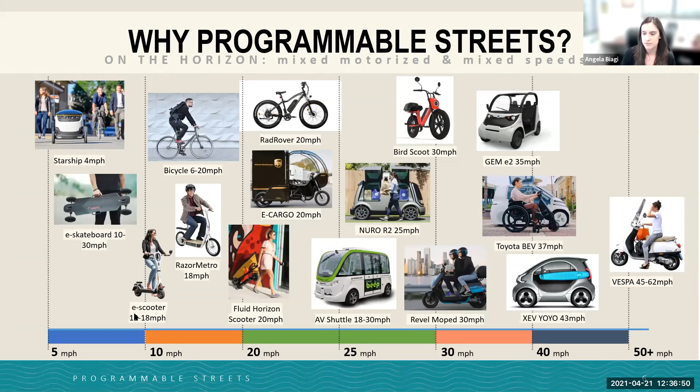A street that's programmable is flexible and can change with the needs of the day. So in the peak morning, maybe there's a dedicated lane for transit during the morning rush hour. In the afternoon, maybe more area can be opened up for pedestrian and cafe dining with less of a priority and less of a demand for vehicles. And in the evening, maybe the lane's direction could reverse to manage the PM rush hour. Lisa's going to talk a little bit later on how we can use technology to accomplish this.

And we've seen what happens when streets are static and there's this competition for space. In just this example alone, you can see the competition for seating, landscape, parking, dining, shade, advertising, lighting. And who's really losing here? When we try to do this all in one for everybody, it's the main user in this case, the pedestrian. Here we've got 3 pedestrians trying to navigate the sidewalk and it's not ADA accessible.

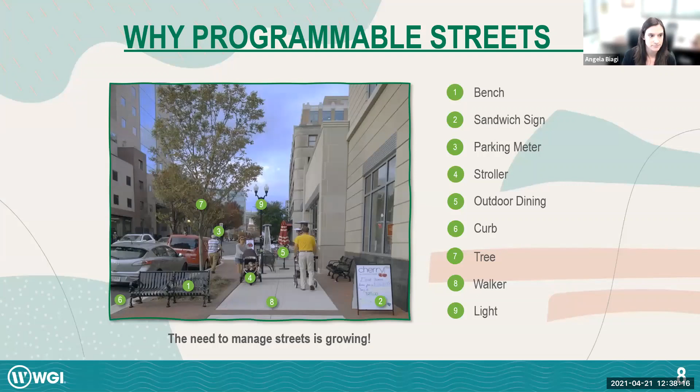From an economic standpoint, programmable streets can be really successful drivers of revenue as well. These are statistics from Texas, where a downtown Dallas street on-street parking space costs $1.50 an hour. If that space is full from 7 a.m. to 6 p.m., it generates revenue of $16.50 in parking. By contrast, if that space was converted to a dining parklet at key points during the day with multiple seatings, it could generate upwards of $300 in potential revenue in dining tickets alone.

So now I want to take a little bit of a deeper dive into how we can physically program these streets.

We learned a lot about this and the importance of it in the last year during COVID. The picture on the left is Clematis Street in downtown West Palm Beach. Shout out to our friends at Dover Kohl, who did a wonderful curbless design for this entire corridor. With this, the city was able to quickly and successfully implement an outdoor dining program on this new street design. I don't know if they really envisioned the level to which it was going to be used, but it worked.

The ability to successfully and quickly pivot the uses of our streets is so critical in making our cities resilient. Maybe ultimately these temporary changes put in place for social distancing will be transformed into a more permanent solution, kind of like the image here on the bottom right.

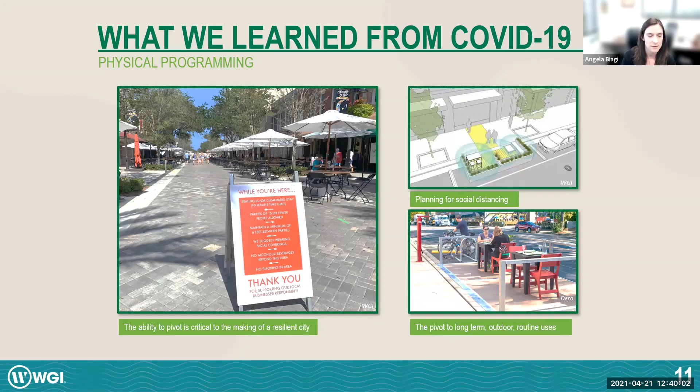We're really seeing growth in the availability of modular and liftable infrastructure to aid in programming our streets. On top, we have a couple planter options: one being used as a bike separator, the other used to define space in a plaza area. Both can easily be moved and relocated with a small forklift.

We've also seen the use of temporary bike lane delineators, as well as charging stations for scooters that can be moved based on demand and need of the area.

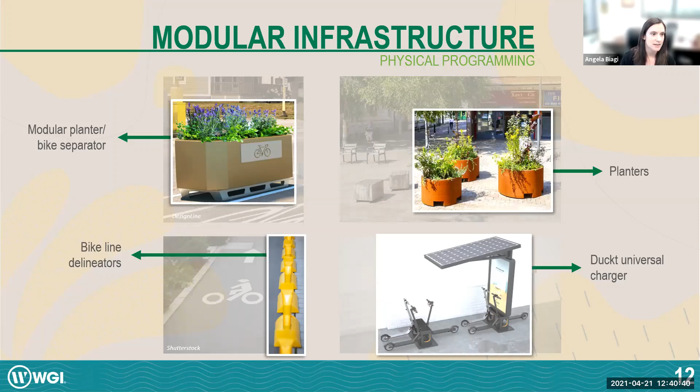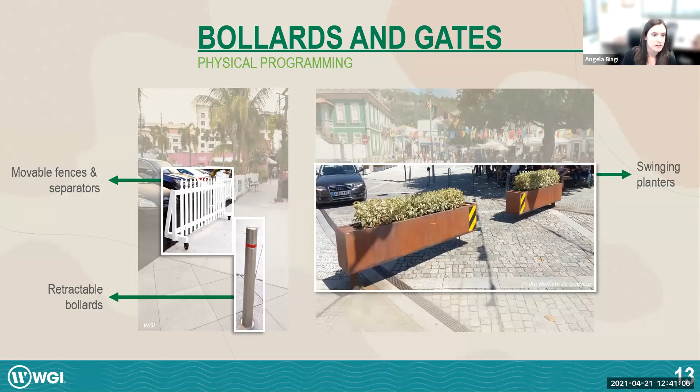To limit vehicle access, here's a couple examples of how we can use movable fences and separators. The top is just a fence that can be simply pushed and rolled around by hand, on wheels. The picture on the right is more substantial planters that swing open and closed to control the road as needed. And of course, we can use retractable or removable bollards for this as well.

Programming isn't just limited to the front of house. It can be expanded into the back of house or alley spaces as well. This is an activation of an alleyway done in Michigan, which took underutilized parking spaces and transformed them into a pop-up demonstration area. While some of these items could be considered more permanent, the space used movable planters, temporary bike stations, and temporary lane delineators as well.

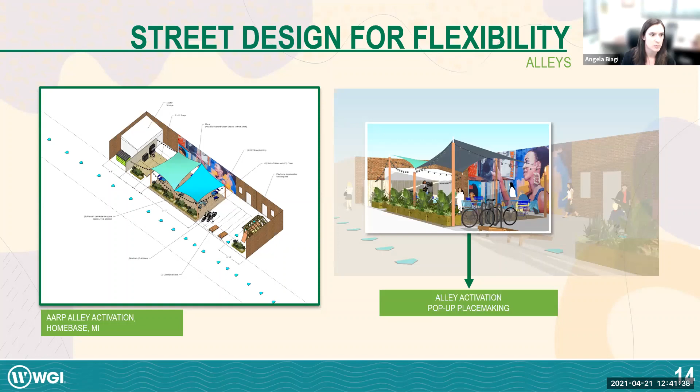Pickup, drop-off, and deliveries have become a huge stressor and user on our streets, not just with rideshare, but also with the rise of e-commerce and food service deliveries. These are a couple examples of how we actually fail to accommodate those users on the street.

Like the image on the left, sometimes it causes more conflicts with traffic. Alex and Jennifer are going to go into more detail on how important this is to our new types of mobility as well.

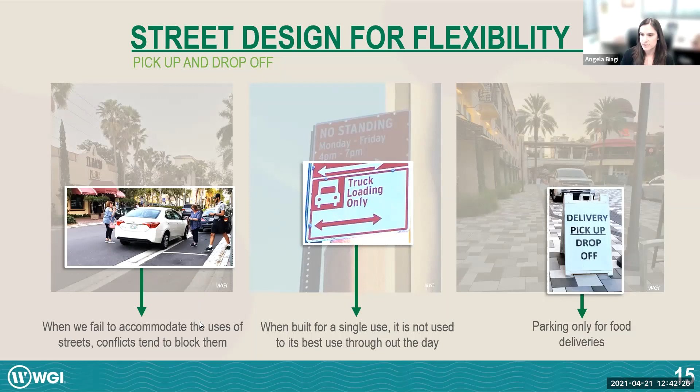When spaces are designed for just a single use, like truck loading or signed only for pickup and drop-off for food delivery, they tend to go unused during periods of time and really just aren't the best and most practical use of the space at all hours of the day.

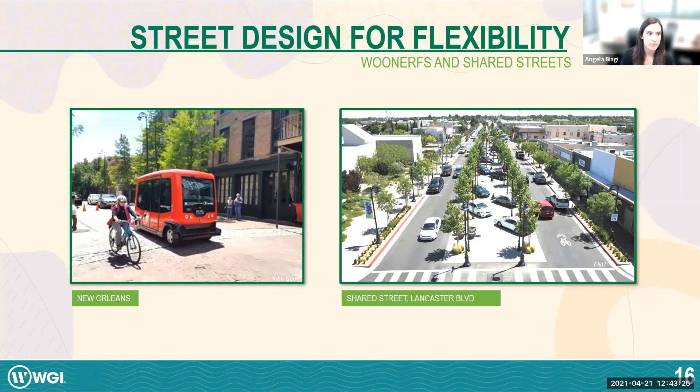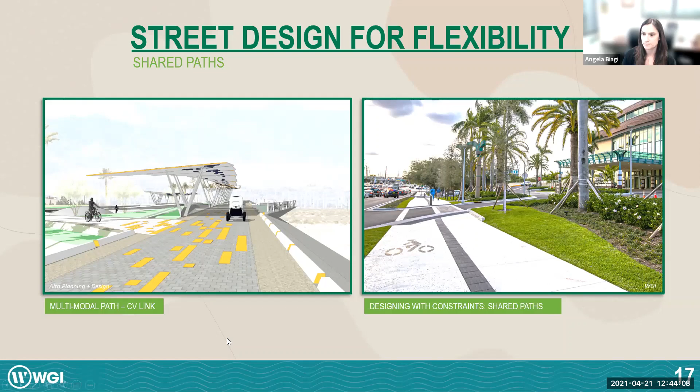At some point, you may want to start making heavier investments and move away from movable solutions to something more permanent. Here are a couple of examples of more permanent bike lanes, green bike lane striping, as well as truck turning radiuses that still remain flexible but incorporate safety as well.

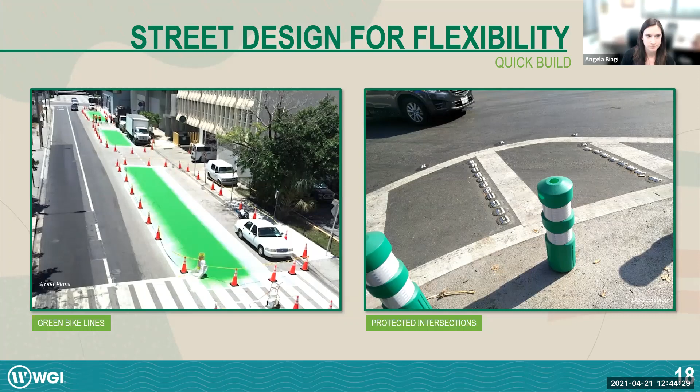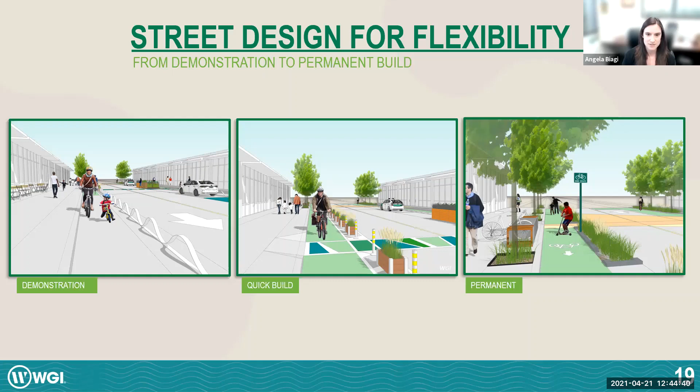Depending on the success and the needs of your project, or the success of any of your programming elements, at some point you may want to move away from these demonstration or quick build stages that we're looking at, toward more permanent solutions.

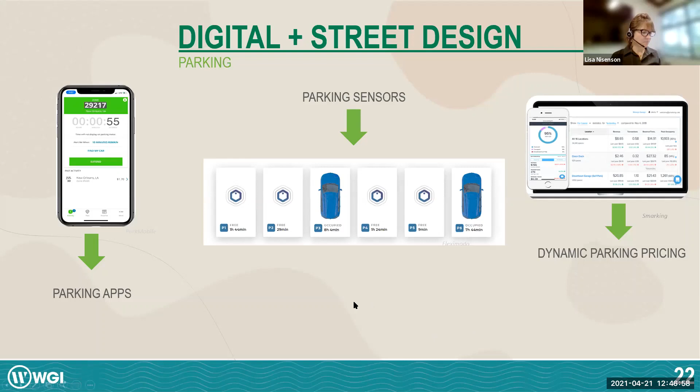Related to parking is this new field of curbside management, which started to come about once we noticed increased demand from ride hailing like Uber and Lyft, and then of course with e-commerce. Whenever you start a curbside management program, the first thing you really must do is inventory all the assets on that curb or on the sidewalk, and in the beginning that was actually really difficult to do, very time and man-hour resource intensive.

So one of the things we've been doing at WGI is leveraging, for example, LiDAR, either mounted on a car or even in a backpack, where we can go out and easily map all of those assets.

To take it one step further, SharedStreets actually introduced something called CurbLR, which is a data standard for asset management alongside curbs. What you see in one picture may be just a meter and a sign, but CurbLR translates that into an open source code. That's good because it means all sorts of entrepreneurs can have access to that data and start crunching it in new and innovative ways to help cities figure out what to do with this really precious resource.

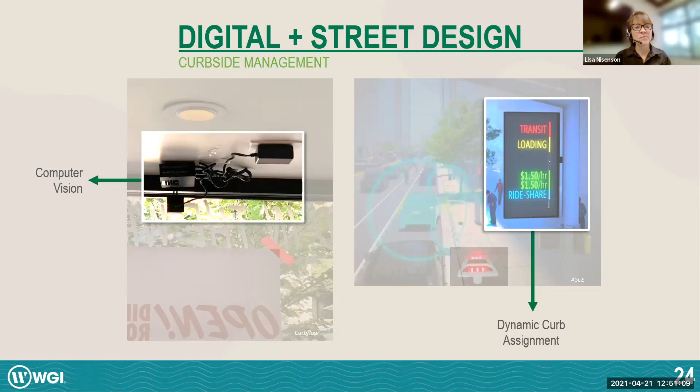Let's talk about digital infrastructure, because this is something that we've started to piecemeal together, but it really does merit looking at as a system. Of course, the 1.0 version is Wi-Fi with some of the antennas, but now with the popularity of 5G phones and with video streaming, and of course with the rise in connected and autonomous vehicles, we really need to build up that bandwidth that's needed along these boulevards.

One thing to point out is that first and foremost, digital infrastructure is extensive. It includes electricity sources, it includes broadband, it includes assets above and below the ground. It's also very controversial because at the federal level, the FCC has actually issued preemptive legislation that limits the ability of a locality to select design and location of these small cell networks. And just to be clear, some of these small cell networks aren't all that small. So what we're trying to do in this image is describe the variety and the extent of these assets.

Starting at the bottom, of course, we're all familiar with the underground broadband that's coming into our city, or has been there for years, if not decades. There's a lot of innovation now there, including something called micro-trenching, where Crown Castle comes in and does a shallow trench so you don't have to tear up the whole entire street. There's also a company called Traxyl that does surface mounts for first/last mile.

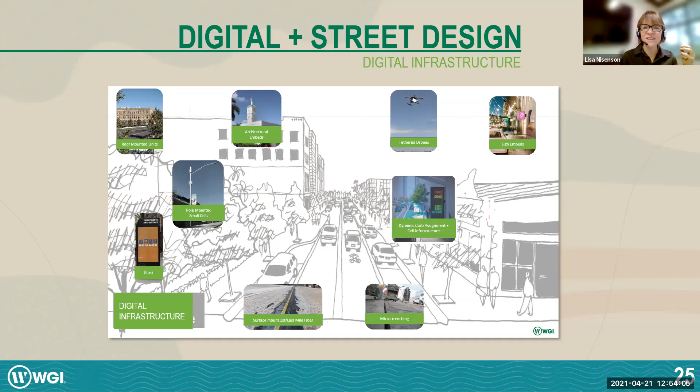This is going to become a bigger urban planning issue in the years to come, and we think it's a good idea to actually get ahead of it and maybe even think of it in the same way we think of other capital investments in the CIP, capital improvement plans. Again, it's a network, it's interlinked, and it deserves to be thought about up front.

Next, and then finally, lane assignment. This is something that's been happening on interstate highways for a while, where you're driving down I-95 or I-66, and you will see these dynamic signs that will tell you all manner of information about crashes, road conditions, things of that nature.

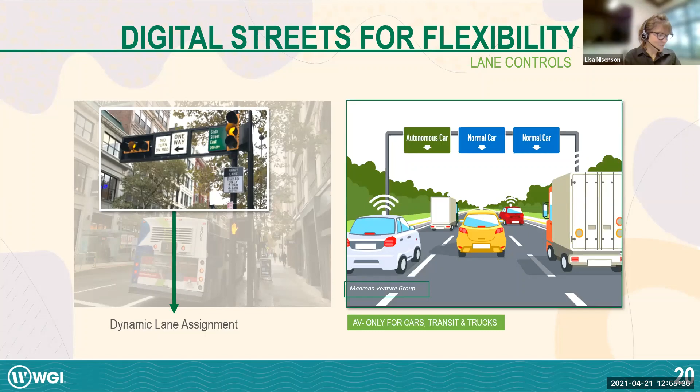So with that, I would like to turn it over to Alex Esposito, who's going to talk about the linkages amongst his service, Circuit, and what it means to have better, flexible, adaptable infrastructure.

Alex: Great, thanks Lisa, and thanks everyone for joining. There's a lot here, and we've touched different pieces of this over the years with some of our services in different cities.

For a quick background, Circuit is an all-electric last mile shuttle service. We're focused very heavily on the last mile, really 0 to 3 miles. And I think there's a big difference between micro mobility and last mile.

There's been a handful of micro transit type programs, not necessarily scooters, but others that I think have tried to do too much. When you start going over 5 miles, that starts to just become transit and not micro transit. So we're hyper focused on those shorter trips.

One reason that's a focus of ours is because historically it's difficult, pollutive, and expensive to move short distances. Walking isn't always an option. And because of that, about a third of all vehicle trips in the US are 2 miles or less.

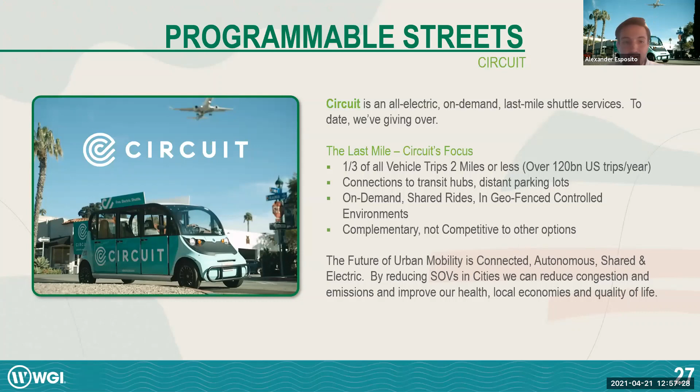On the next slide, I think what's unique about our services is that we offer a full stack solution to our transit partners. Transit partners is the umbrella term we use, whether it's a city, a community redevelopment agency, or a private development. Collectively, we dub those transit partners.

Our full stack solution is custom designed to that client. That includes the app, which is fully customizable, but you'll see it's geo-fenced in this picture. So again, we're not trying to compete with other forms of transit, really trying to be as complementary as we can, making connections whether to distant parking, existing transit hubs, or just getting people out of their own single occupancy vehicles for these short trips.

All of our rides are pooled together, using shared electric transit for those types of journeys. Getting back to the turnkey operator model, we really roll up our sleeves and work closely with our customers, and we provide drivers, who are W-2 local employees.

We provide the vehicles, which are all electric. We provide the technology, which is again totally customizable. And we handle the insurance and everything else. So it's built for the city or transit customer, and then operated and managed by us.

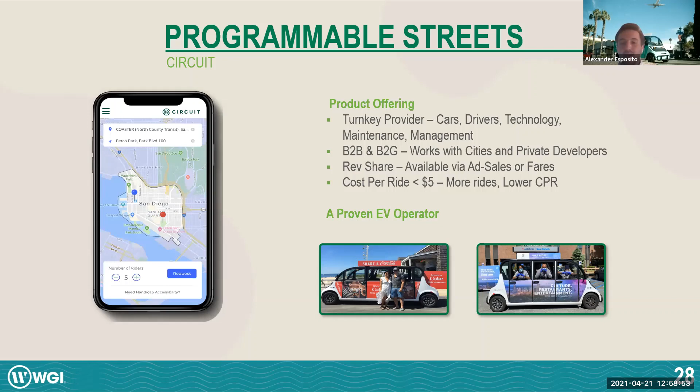One of the things we've learned over the years is that people like things on demand. I think Uber and Lyft have taught us that, but unfortunately that doesn't always work well in cities, and it can lead to a lot of traffic and congestion. So when we think about programmable streets, there's a number of use cases that come to mind.

A lot of urban traffic, some studies show as much as 30%, is the result of people driving around in circles looking for parking. So if there's situations where there's another parking lot that's off the beaten path, we can help with that 1 mile journey and get somebody to park there.

That really ties into some of the more dynamic parking pricing taking place, where somebody might not be as discouraged by a parking lot that's further away if they know they have a ride to get to and from it.

Other situations are transit hubs. So some of our customers have actually asked us to set up smart spots. It's on demand, but the pickup and drop off spots are predetermined. We can set those up so that it's actually driving traffic to and from those transit hubs.

Whether those are buses for longer trips or trains. More recently, we have been looking more into the delivery side of things. The city of Santa Monica, for example, is currently doing the nation's first green delivery zone. The idea is that big internal combustion vehicles aren't doing those last mile deliveries, and we're fulfilling that last mile with electric vehicles or by foot or by pedal.

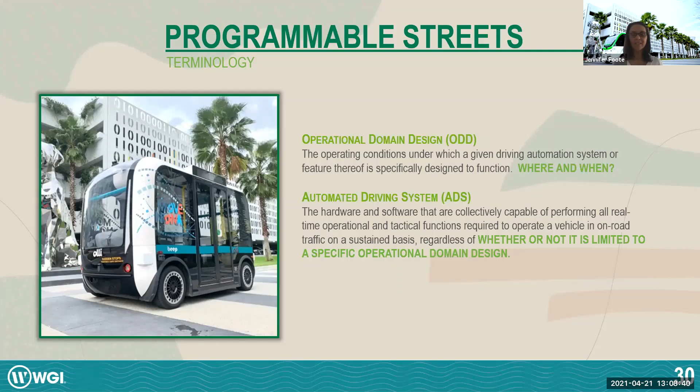So the current ODD does present some challenges for us. First and foremost, we're on a pre-programmed route. So if you think about some of the really cool things that Lisa and her team and Alex was talking about, dynamic lane assignment, dynamic curbside management, digital infrastructure, all of those things mean that the environment is changing all the time. And so with the current ODD, it's a pre-programmed path that allows the shuttle to operate.

And so one of the major things that needs to happen within that feedback loop, and one of the reasons why we're so excited that we have that relationship with our partners, is to help them understand what's coming from the infrastructure side of the house that they need to be ready for to allow the shuttles to operate more ubiquitously in autonomous mode around the country.

But a couple of other things that programmable streets can help with. So right now there are some lane requirements. The lanes have to typically be a minimum of 10 feet wide and well marked so that we're able to gauge where we are on the pre-programmed path.

We like to avoid on-street parking. If we can't avoid it entirely, it simply means that we go at a lower speed, which then degrades the customer experience. And so these are things that, while it's doable from a technology perspective, it may not be most optimal from a customer experience perspective.

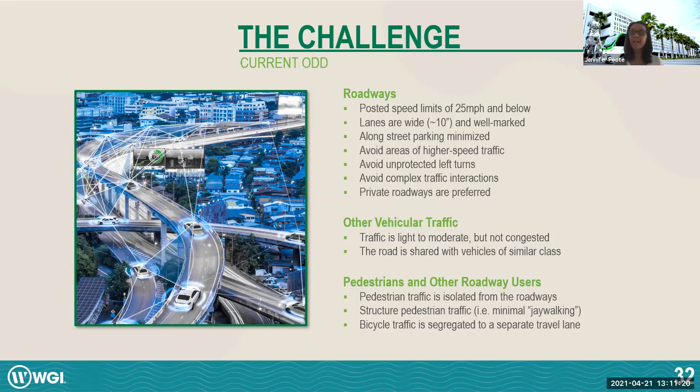So next slide then talks about some of those areas where we believe that programmable streets can help. So when we talk about dynamic curbside management, one of the things that came to mind is if we know that within certain hours, it's going to be restricted to loading zones for food deliveries or supplies deliveries.

If we're able to have that two-way cellular vehicle to infrastructure communication, we're able to tell the shuttle, hey, you need to recognize this lane is going to be closed, and the shuttle can then operate more dynamically by going around, sensing its environment and making those decisions to move out of a lane and around when it's safe to do so.

Thing with programmable parking and how those things change. So allowing communications from parking meters, for example, if someone has chosen to park for a certain period of time, the shuttle can receive communication that says the risk is lower. Nobody's expected to leave within the next hour. Perhaps you can continue at a higher speed rather than slowing down.

Obviously, having infrastructure that signals to the shuttle that it's safe to make a turn or safe to maneuver in a complex traffic situation is certainly going to help. And then having situations where you have additional cameras or things on those, digital infrastructure, dynamic lane assignment will communicate to the shuttle, hey, this is a time when you're free to operate without risk of pedestrian or cyclist interaction. This is a transit only lane between these 2 hours.

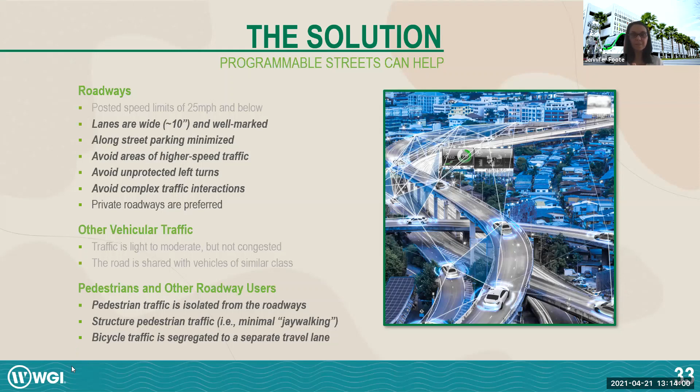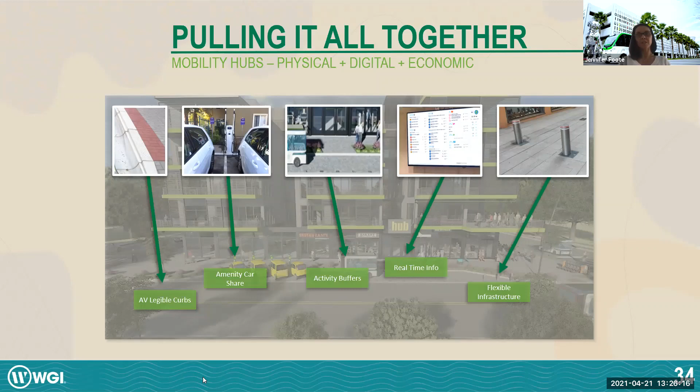Yeah, and Alex, I agree. We've seen a dip in ridership because of COVID restrictions and social distancing on the shuttles. We can have upwards of 300 passengers across a 6-hour shift per shuttle, but it really depends on the use case and the location. And that's a post-COVID recovery number. We're seeing ridership tick up week over week consistently since we came back into operation in June.

Great, and I'm going to end with a question for both of you. We certainly may have people who are like, wow, I really want Circuit and Beep to come to my town. What tips do you have about how to get ready for some of these digital services, and really what should they be talking about to their city or county manager, their Department of Public Works, and their transit agencies?

Yeah, I can hop in first. A few things that immediately come to mind: the focus on multimodal options. I think oftentimes transit agencies look at how can we just have a blanket solution. But a scooter is a great way to get around for some, but not for everyone, so you need alternate options. The other thing is there can be concern from transit agencies about it competing with their existing services. So understanding what those use cases are, so that they're designed such that doesn't happen, is also important. And ultimately, it's a great return on investment. TRB has done countless studies about the economic return on investment in transportation as it relates to economic development and job creation. So oftentimes, 'oh, that's going to cost a lot of money' is the initial knee-jerk reaction. But when you actually start to dive into where it can help save money and how it can help promote economic activity, all of a sudden that sticker shock starts to be relieved a little bit.